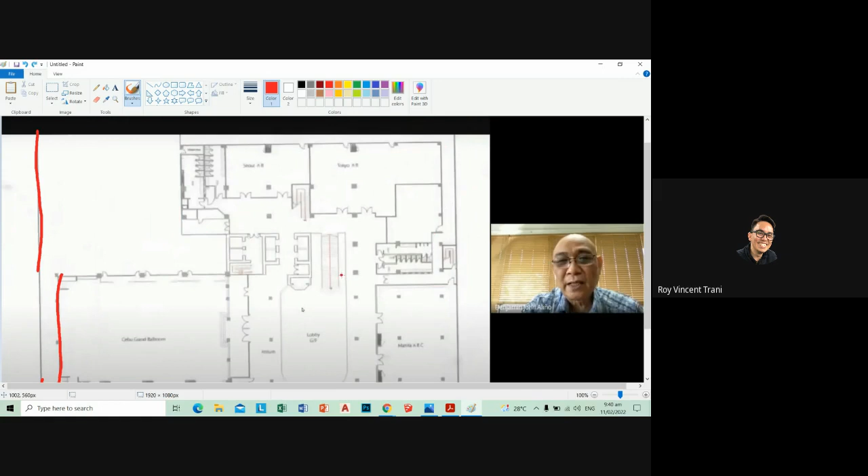Control V. I'm going to zoom in a bit more. This is a very good presentation by Sir Linio because he actually got the floor plans for it. Notice this door here - oh yes, sir, yeah, so this is the service elevator.

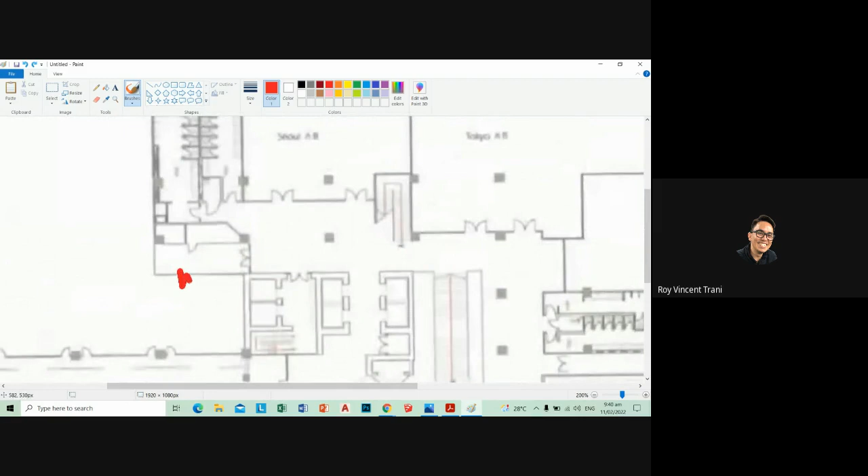So they can come in here from the kitchen. There should be a door here - I don't know why there's no door here. So this whole thing is the kitchen over here. Let me zoom out.

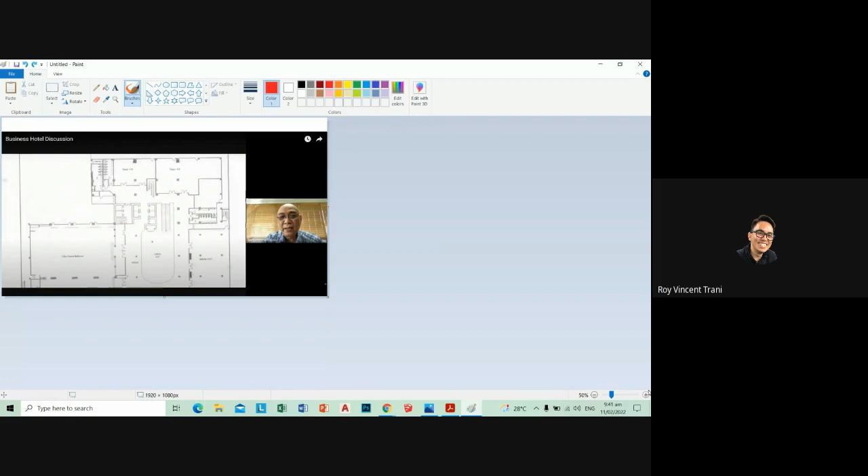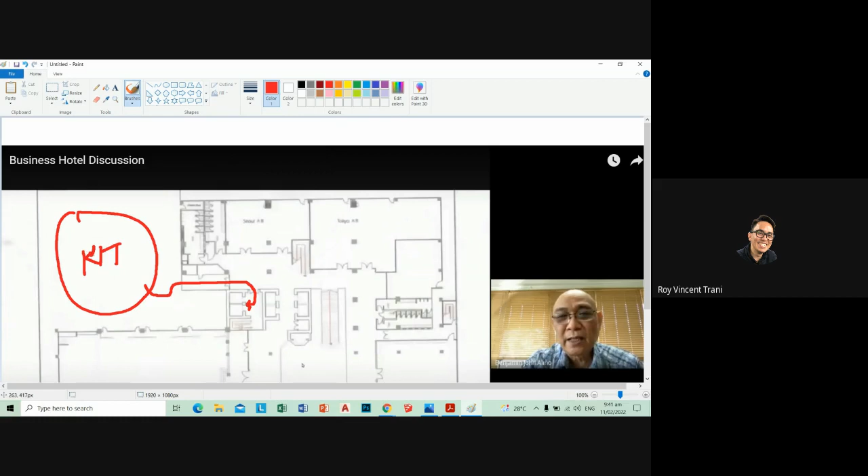This whole thing is a kitchen over here, and they should be able to go from there to the service elevator, and then they bring it up to the second floor. The way you design it is these elevator shafts should be more or less in the center of the building, so that whatever floor, both the service people and the public, the guests, have access to whatever rooms are there. So that's basically how you send food from the kitchen on the ground floor to the upper floors, like a service elevator.

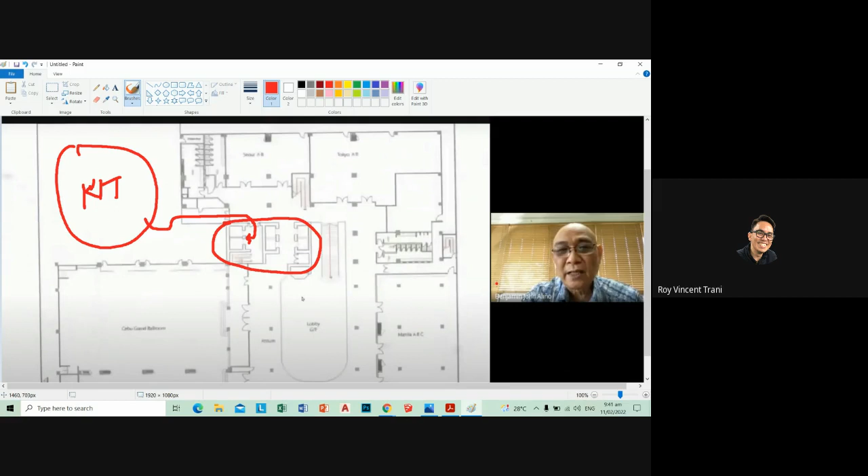Okay, and then we should be able to see this in your architectural programming sections in your research. At the very least, usually the elevator shafts are in the center, and I think Sir Alinio has a couple more examples. Just go through this video, and I think we can go through it now. If anyone has any questions, feel free to stop me because I'm waking up now.

This one, the L-shaped one, was very interesting. Print screen, I think I just need to use Photoshop for this one. Because it's an L shape, it's hard to make it centralized. File, new, let's just make it 120 dpi. Control V. There we go.

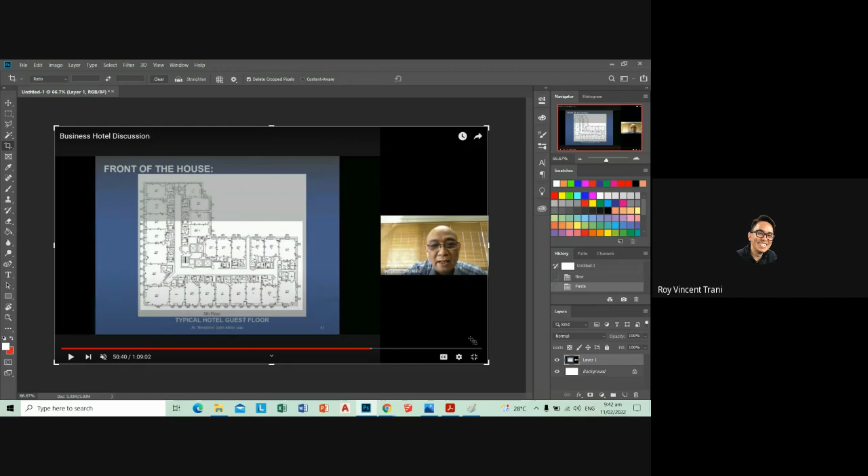It's very interesting because you have the central elevator shaft here. Sorry, just making noises. You have the elevator shaft here, and notice that I colored it in blue. This one is the service elevator because you see the doors that sort of hide it. And then this one in green is the guest elevator, so it's like open directly to the hallway.

Remember we talked about last time, for those who are under me, we need fire escapes, at least 2. So here's a fire escape over here, and then there's no fire escape anymore over here. So these are the 2 fire escapes. I'll just color it in orange - fire escape here, fire escape here.

The reason for that is wherever this building was made, could be American or something, there should be a minimum distance that this hallway can be. I think in our fire code it's somewhere between 25 to 30 meters. So as long as you maintain that range, you can have no fire exits here, but with the provision that on the other end you do have a fire exit. So that's fire exit 2, that's fire exit 1, and this would be about 25 to 30 meters.

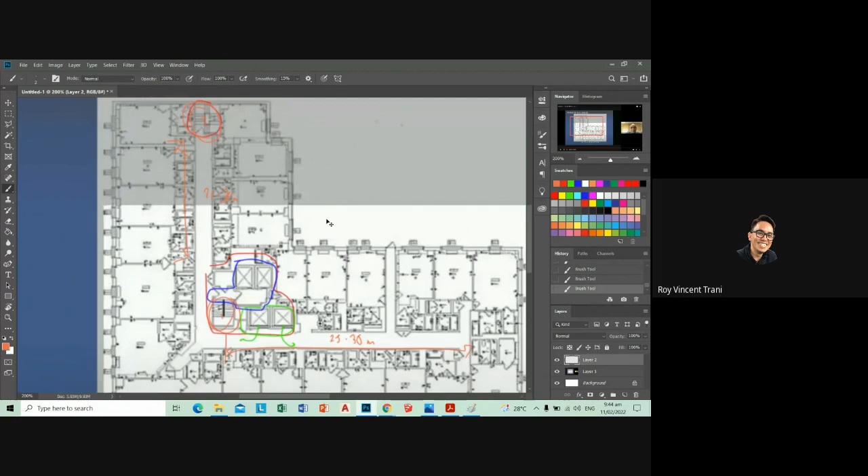So these are the things that I already know or am very familiar with, and I don't want to read it anymore. I'm so tired of seeing this over and over again. So that's why I'm focusing on the innovations. Show me something that you want to do, and then I'll just give this to you. Some teachers will definitely disagree with this - it's very quote unquote spoon feeding, but I think the real learning comes from you guys wanting to apply something new to the design process, not just like 'oh, I have to look at NBC again.' No, no, no, no. Because even in... I'm just ranting.

Please, someone ask a question. Any other questions? No other questions? I guess I can continue then.

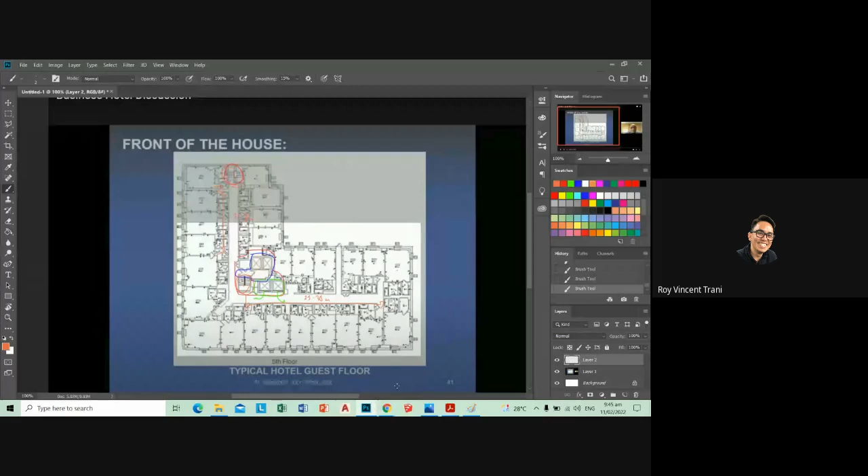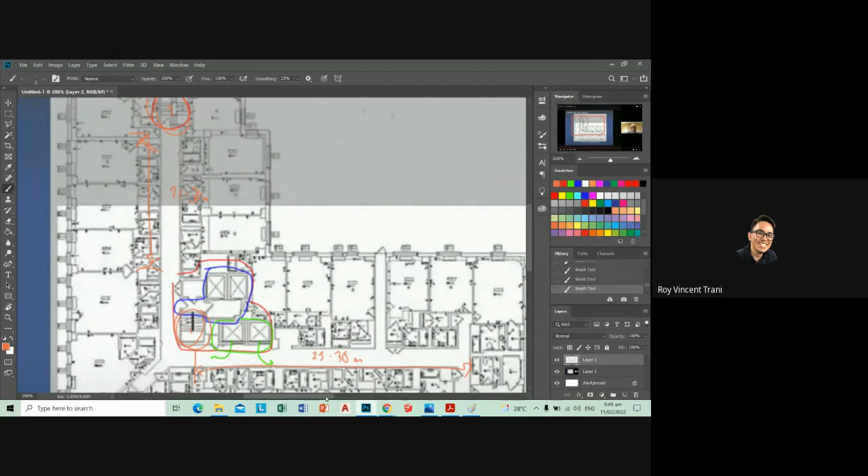Because even in professional practice, these things, a book, it's not really something you need to memorize. You can be familiar with it. And I think after almost 3 to 3.5 years of architecture, you already know where to find it. So what I will do for this class is just make a Canvas post with all the design stuff. I already have my building codes here, not building code, time saver standards here. And I'll just basically list down the parts described by Sir Alinio, and just in general, because I'm sure we all know about this.

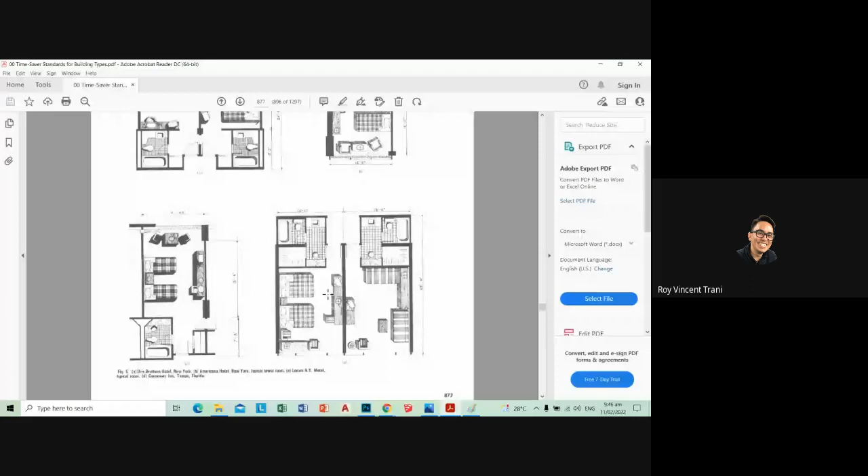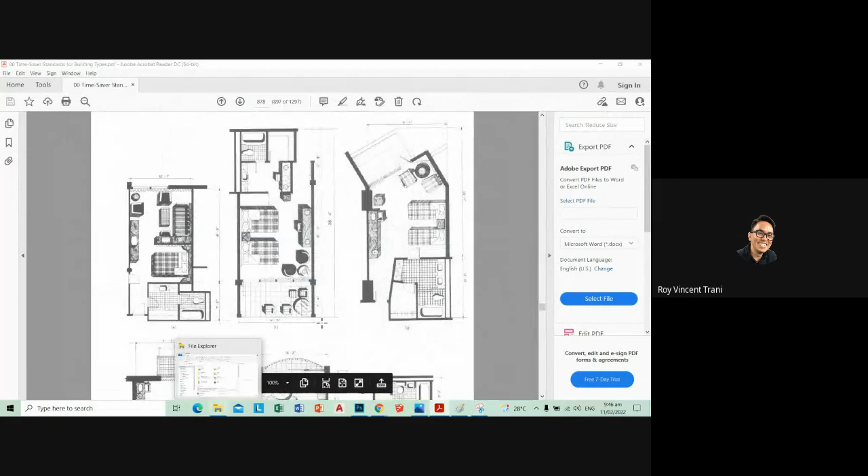And then we just add more information as we go along. And then everyone will have their own sort of way of making the bedrooms because they have their own goals, whether it be sustainability, bioclimatic, hospitality, stuff like that. Let me see here, as an example of how will the bedrooms be different. Let's see, save bedrooms. Let's look at two different themes or concepts. So the bedrooms.

This is for our schematic phase. I'm just jumping ahead here.

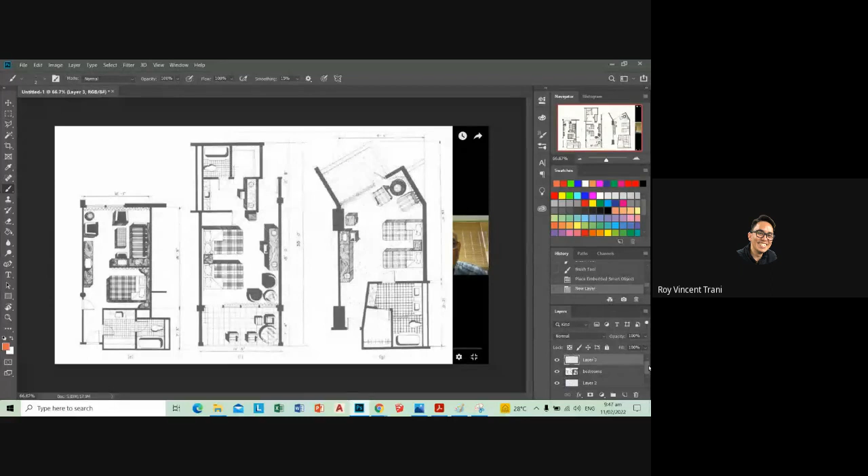Let's say you already decided the theme. Let's write it down here in blue: Bioclimatic. And then the other one was hospitality. Let's make this bigger, size 60, 72. So let's say hospitality will be in red.

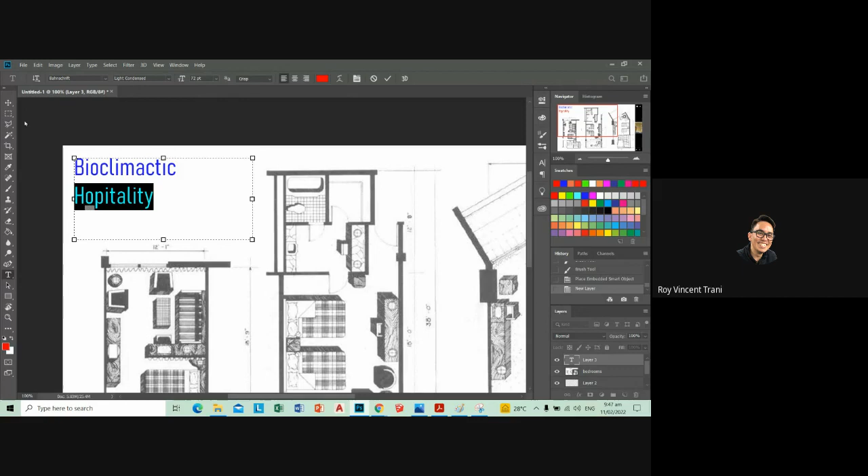So from what I understood—I already forgot the name of the student who shared it—bioclimatic design means it's adapted to the environment.

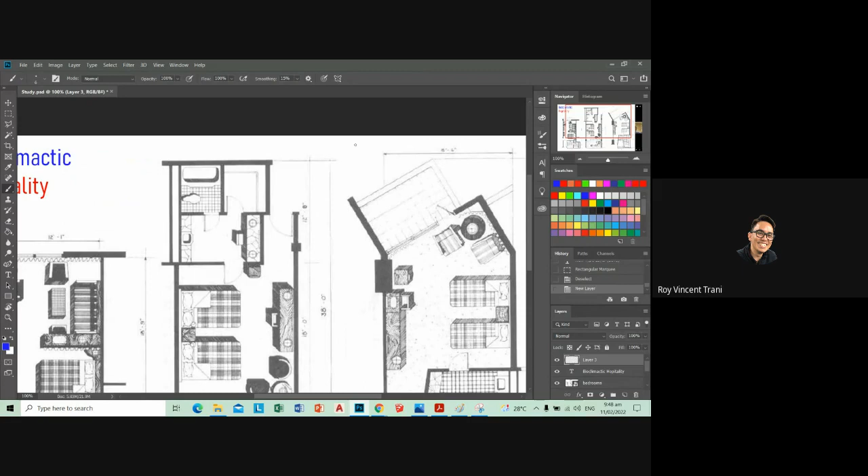So let's say our north is this way. This is why site planning is very important, and tropical design is very important, because depending on the orientation we're building, there are a lot of impacts. So let's say north is this way, meaning your sunrise is here, and your sunset is here. I'm just drawing with a mouse—okay, I think I need to switch a tab.

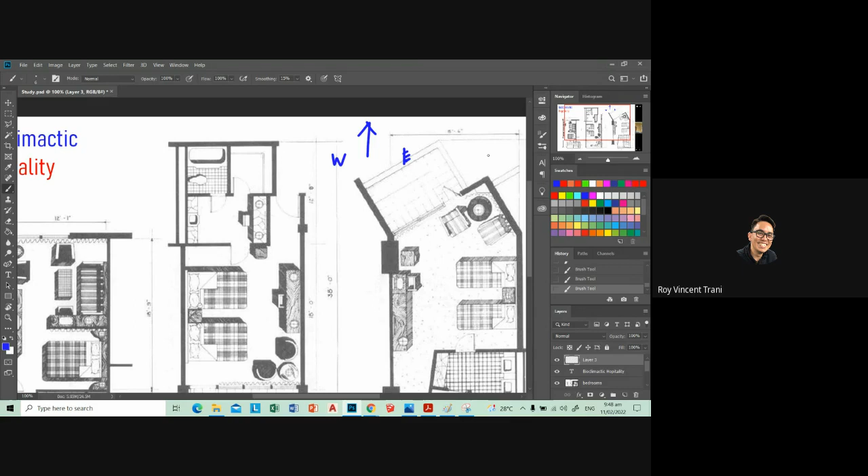So because we're focusing on bioclimatic, the room has to be bioclimatic. Okay, so for example, we have this setup where north is up, east is to the right, west is to the left. Just looking at this room, let's keep it as is. This room is open here—this is a balcony. I'll just write it here, BAL.

Now, is this bioclimatic design? So east is coming here, on this side. The number one thing that already pops out to me, and I'm sure to some of you as well, is that the balcony is not facing the morning sun. It's facing the southern sun, which is not very good, because typically you don't want too much sun—the Philippines is already pretty hot.

As we discussed in AR 2233, the hottest point, or the area most exposed to the sun, is south. However, the hottest point, if you go through the solar sun chart, is actually a bit more north. But in general, the sun goes through the southern part more because of the location of the Philippines, etc. I think we had a quiz on this, and I may have been too focused on the hottest point and not the average or more often hottest point, the south. So already, this scenario where north is up and the balcony faces south is already not good for bioclimatic design.

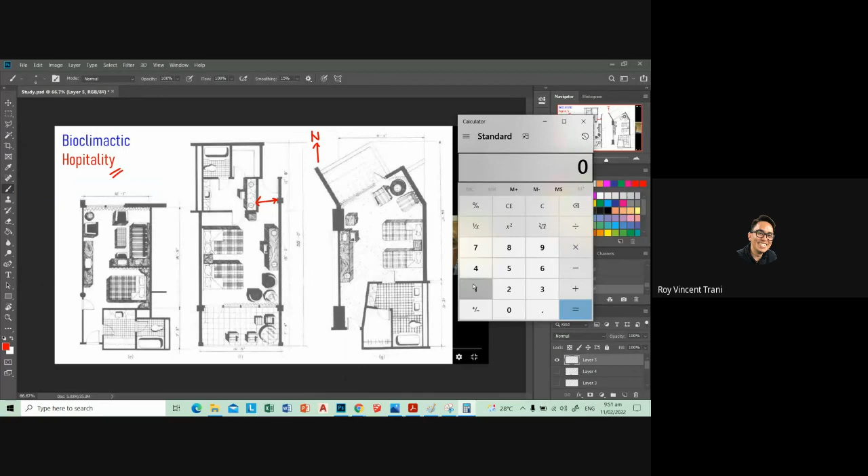So we'll make a calculator: 14 times 3 point—okay, I forgot, just make it feet, inch, to meter. Let's see, 14 feet and 5 inches, convert: 4.39. So let's say this is 4.39. The issue with these more social, broad, or abstract concepts is, how do you create hospitality? You really can't put it into numbers. You can just make it a bigger number. So this is 4.39, maybe you can just make it 5.0.

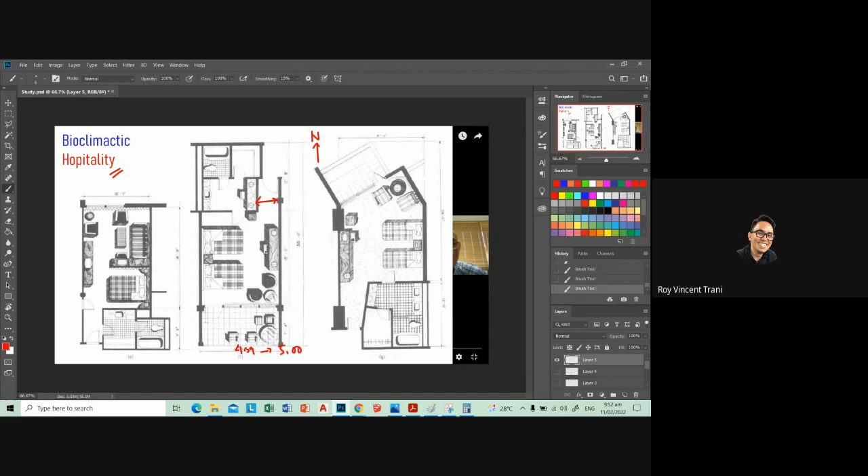And this is where your anthropometrics comes in. So what is the minimum or average dimensions of a Filipino person, if you're targeting Filipino people? Let's say the width shoulder to shoulder is 600 mm, or 0.6 meters. So we're all in meters—0.60 m. And with arms outstretched, it would be about 1 meter. If this room is 5 meters or wider, you need to make a room that's comfortable to open your arms in. You can cite sources that basically whatever makes people more comfortable, you put that into your design—whether it be making hallways wider, making rooms bigger, or even changing the color scheme, which could be interesting and refreshing to read about.

So yeah, that's basically how you apply your concepts as we go through the research and the schematic phase, and then eventually the design development or preliminary phase.

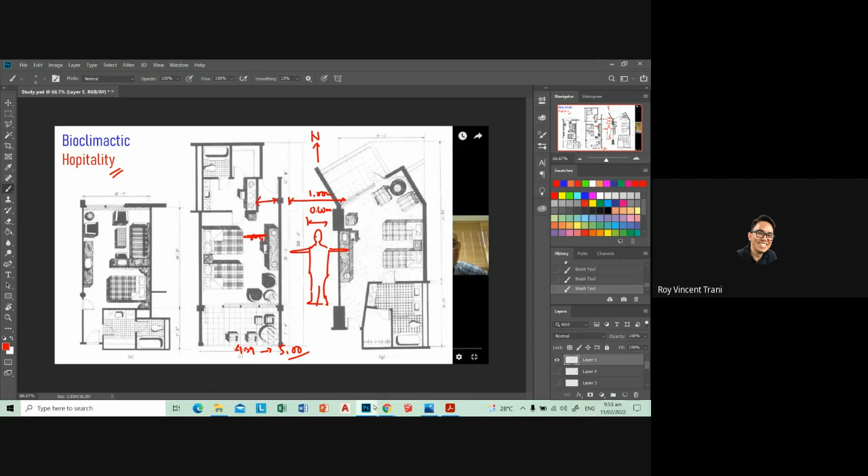Okay. Let me close this, close this. Don't save. Not yet.